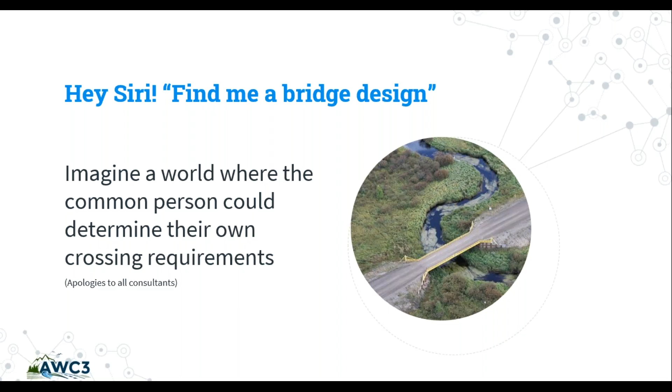So, the most common question I get when I get asked to come to a bridge site is, what do I need here? What do you need to build? Maybe a washed out culvert, it may be some failing infrastructure, it may be a complete greenfield site. A client, an asset owner, stakeholder says, well, what do I need to build? Unfortunately, in the world of construction and bridge building, there is no Google answer to what bridge do I need. If only there was. It would make my life easier, probably make it less profitable, but it would make engineers' lives easier. I guess we could say that there'd be the WebMD syndrome, where you'd have a client who thinks they know what they need, and the reality is they actually don't, but that's not a discussion we'll have today. So let's jump into this.

What this presentation is not, guys, I'm not an expert on regulatory issues, approvals, processes. I'm not going to talk to that, mainly because I don't want to be called out for it during the Q&A period, because I don't have a clue what I'm talking about. It's not a call for the change to the current code of practice. I think Steve Acorn discussed last week best management practices. These best management practices are in place for a reason. I think as contractors, consultants, clients, we are diligent in everything we do. We do try and put our best product forward. We try to manage those practices in a means that's environmentally

respectable and manageable. What I do hope to accomplish today is just rally everybody around a conversation or the necessity for a standard set of bridge specifications at the resource level, because I think by and large it's lacking in the Alberta resource sector.

This isn't a comparison or a BC trumps Alberta scenario. I see some things on both sides of the border, some that can be transferred from BC to Alberta, and of course some that can be transferred from Alberta to BC. But this particular day, I want to talk about what this standard set of specifications could look like and how it could help us as industry experts to progress water crossings in Alberta for the better, of course.

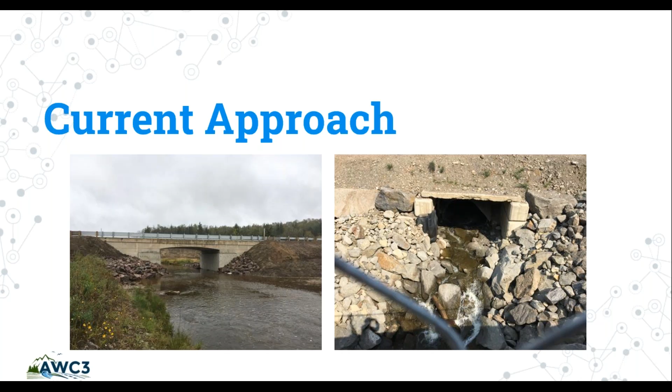So again, back to my original comment. Why is it that the Alberta Transportation Standard Specification, the same code, the same standard, the same set of design parameters is used on a $100 million highways bridge as it would be expected on a $100,000 resource bridge? And we see it all too often. You look at any general notes section of a resource bridge drawing and you'll see reference to the Alberta Transportation specifications for bridge construction. Now, let's not say there's not some good content in there, because there is.

You got to search for it though, and I hope to talk further on in this webinar about taking some of that information, taking the good bits and pieces and refining that down to something that can be used at our level in the resource sector.

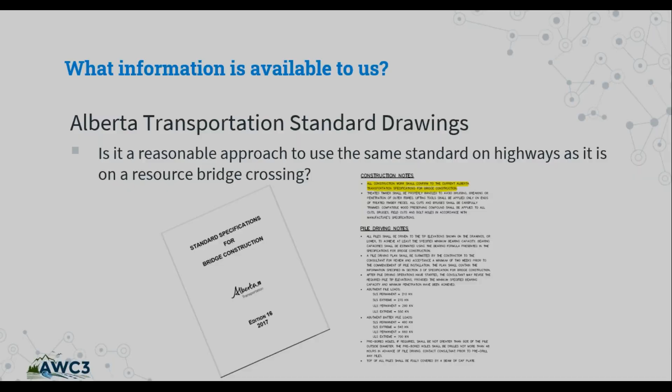What's the cost of using this Alberta Transportation Standard Specification at the resource level? If you take cost on average, and again, I'm sure some of you might disagree with these numbers, but this is just a quick historical search through tenders that I've lost in the last couple months, the average cost for a municipal highways bridge in Alberta ranges from $7,500 to $9,000 a lineal foot. Caveat.

On the resource side of things, that number comes down not significantly, $4,500 to $5,500 per lineal foot to construct a resource style bridge. Now that is supply and install, and that's not including the 40-foot bridge that you had left over from 3 years ago in the boneyard that you put a new wear deck on. This is new construction at the resource infrastructure level, supplied, installed to this Alberta Transportation Standard spec.

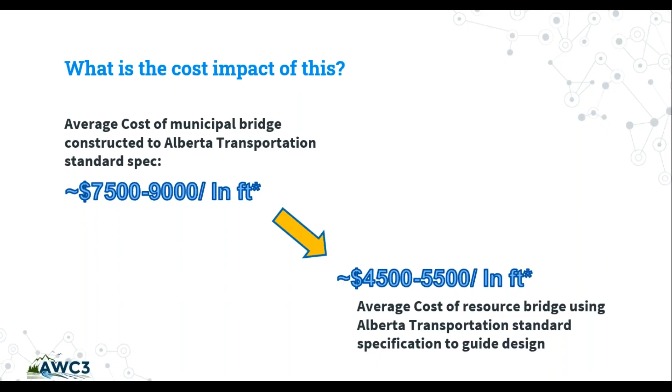And of course, what happens if you don't have that $4,500 to $5,500 a lineal foot to float? It's not a plague in our industry, but it's a blemish on our industry. When you don't have the capital, you often find yourselves doing the quick fix. And unfortunately, the quick fix all too often isn't the right fix.

I'll take this bridge for an example. Client didn't have enough funds to replace the structure. Didn't even have enough funds to test the steel for that matter, but the solution was a redeck. No timelines on when they were going to replace that bridge. They just figured a redeck would work. It would be aesthetically pleasing, and hopefully they would retire before this bridge became a future problem.

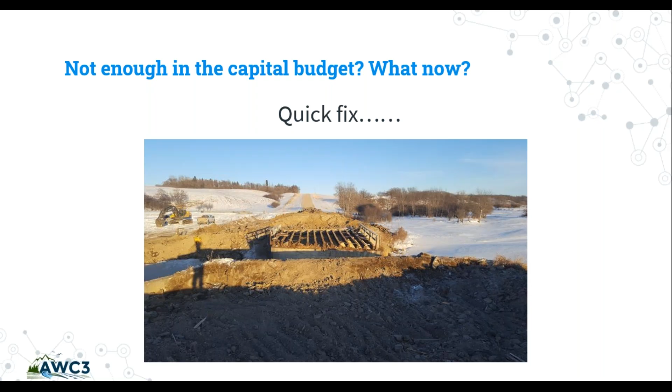So how do we improve on this as industry professionals? What do we take away from this? What do we take from that Alberta standard specification? What do we take from what we know? What do we take from each other and refine it down into a smaller package, something we can quickly reference to understand what we need in the field at any given time?

And again, I said I'm not going to stack up the flaws of BC and flaws of Alberta and compare the two. But what BC does have and what is used practically every day is a Forest Service Bridge Design and Construction Manual, or a BC Ministry of Forests standard set of specifications. This is a complete drawing set at the resource level that defines the parameters to install these industrial bridges or this industrial infrastructure. Very easy to use, very quick to reference, and an overall effective tool, to my understanding.

How is it effective? I mean, it's seen from a monetary stance alone. The average cost of a resource bridge in BC, $2,900 to $4,200 a linear foot. On the worst scale, it is still cheaper to build a resource bridge in BC than it is in Alberta. Why? I'm going to ignore the macro factors here for a second, and obviously there's some geotechnical issues and a whole bunch of other things. But at the end of the day, I would argue that by and large, the use of this standard specification helps drive everything from the engineering level to a level of comfort with the fabricator, to a level of comfort with the contractor to know what they're going to build on any given day.

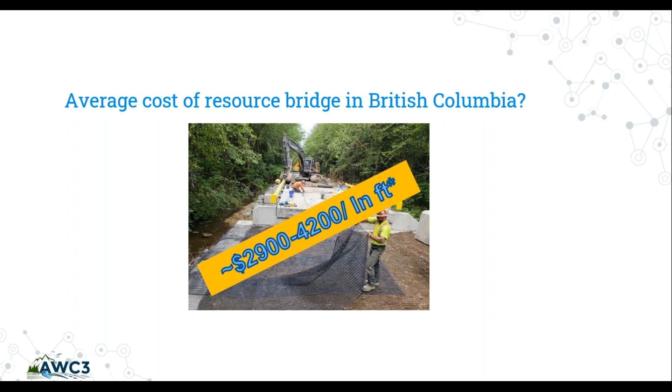At the resource side of things in Alberta, it's often, what do I have? How can I make this work? What can I take, knowing what I know in BC, and try and apply it to this? But for whatever reason that may be, the cost at the end of the day always comes out heavier on the eastern side of the Rockies. So where do we start? How do we take what we have, refine it down, still take away those key components, and come up with a standard set of drawings that applies at the Alberta level?

Arguably, it's quite simple. We take what we have. We streamline the existing standards. We choose the concepts that work for us. We choose design concepts that are practical to the client's pocketbook, practical from an engineering perspective, and we modify these with constructability in mind. What sort of equipment are we using in the Alberta resource world? Who as contractors are available out there? And essentially try and almost dumb it down so it's opening up the playing field to all contractors, all consultants. Anybody can read these standard specs and apply it to their potential crossing.

And that in itself is the basis of where I think we should start with this. Take what we have, take that Alberta standard specification, pick out the pieces that are good, pick out the pieces that apply to what we do, take out the galvanized W-beam guardrail brackets, the stuff that no one's going to look at, page 263 of the standard specs. Take that junk out. What do we need? Let's simplify it. Let's apply it.

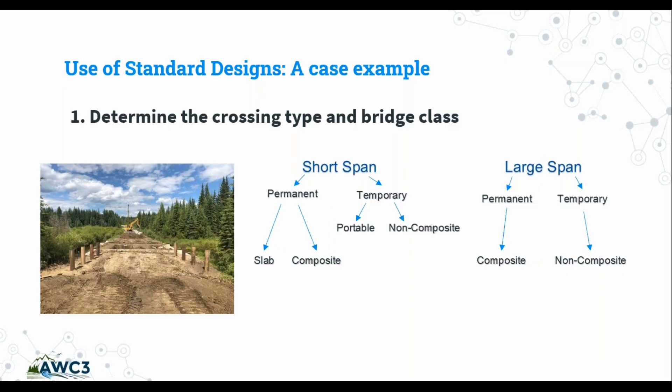Now, what sort of bridge do you need after that? My hope is that the engineers, the consultants that you hire would come in and attempt to guide your decision on whether you need a slab bridge or a composite bridge. That at the end of the day comes down to dollars, client's pocketbook, what's available to us as builders. You can take the same set of standard specifications. What do you need as a substructure? All too often in Alberta, we're going to resort to driven piles every time. There's a few licensees, woodlot owners, asset owners at the oil and gas level who recognize that some slab footings are now available to use.

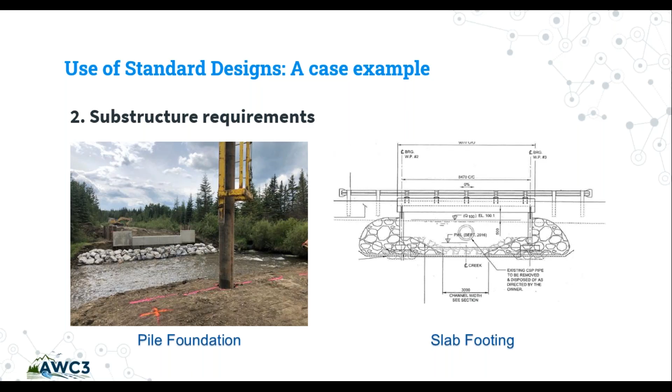So you pull up your standard set of specifications and realize, okay, what size bridge do I have? Quick reference, what size piles may I need? Or alternatively, what size slab footing do I need based off my loading requirements, my design vehicles, my bridge width, so on and so forth. And again, I'm going to jump back to the BC Ministry of Forests standard specification. Within the first 3 pages of this, you can establish those 2 things, the type of bridge you have, the type of footings you need. Now you're just saying, oh, what type of footing do I need? Is it that slab footing?

The BC Ministry of Forests standard specs is a beautiful thing because it lays this out perfectly for you. You go in there, recognize your load ratings. You have footing sizes identified right there. You have a footing type identified right there. You have your max min dimensions. Myself as a contractor, I can look at this, figure out what I need, figure out a material quantity, and without soliciting pricing from various fabricators, I can get my pricing relatively close to what the material cost is actually going to be on this bridge.

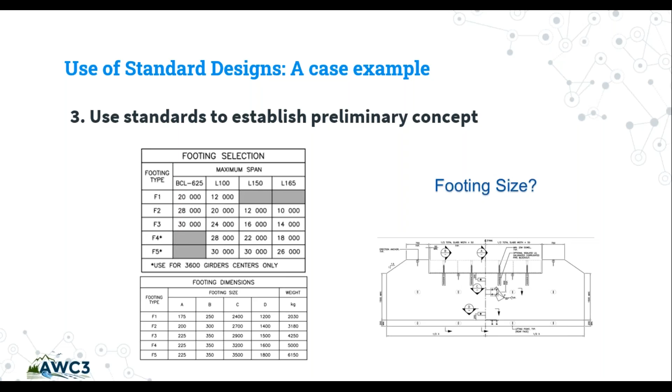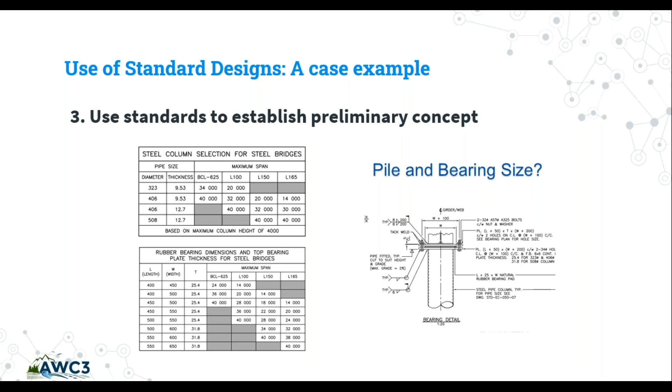The same is applied to piles. If we did decide that piles were the best method, of course, we would rely on a geotechnical expert to guide us in this decision, but we know what size piles we need. We can do quantity takeoffs based on that. And all this information is right there. It's at hand.

So why go through all this effort? Why are we as industry professionals going to collaborate and come up with an industry standard set of specifications that works for all of us? Is the benefit there? Is it worth our time, taken out of our days trying to make a dollar, to come up with what's better that someone else can use later on? That's kind of a trite response, but why the effort?

As asset owners and contractors like myself, builders, it provides us with the framework to conceptualize our own crossings. We don't have to phone the engineer on day one to get him out there to take a look at this. With this standard set of specifications, we can go out there and say, okay, with the tape, hip chain, whatever you have, I need a short span here. What type of footing? Well, phone the geotechnical engineer, kick the dirt around. Maybe you'll figure that out pretty soon. It also gives us the background to question third-party designs, potentially decreasing cost. I use this all the time in BC.

Depending on the engineering consultants, some have experience at the resource level, often others do not. And for those that do not, we see a trend to over-design beyond what is needed on the crossing. And having this framework allows you as an asset owner or a contractor to potentially question this and raise the question of potential value engineering in the structure itself.

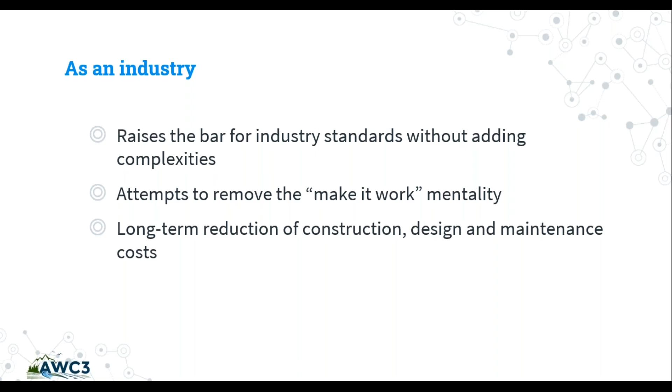So what's next? What's next for me? What's next for the consultants? What's next for the clients of infrastructure assets in Alberta? I mean, the short term, what I really see working, and I know this can be applied kind of in that northern Alberta region because I work closely with a lot of stakeholders, clients up there.

We establish a standard set of specifications at the regional level, oil and gas, the forestry, and perhaps we roll this into the road use agreements. If anyone's replacing a structure, this is the standard that we're held to. Potentially get some engineer buy-in on this and push this thing forward.

Long term, I know it does take some time to change these standard specifications. If you go back to the title page of the Ministry of Forest standard set of specifications, I think it was dated 1999. There's been some talk of some change. I'm sure there's been some amendments to that. I do know the designs are updated every so often.

To actually change this thing at the provincial level is going to take some time, but there's no reason why we, as industry professionals in this northern Alberta region, we already have the initiatives in place, of course, with this AWC3 Alberta Watercourse Crossing. A lot of the people who are active within this are in that northern region. That's where I would start the conversation. These are the people who are pushing for a change, pushing for innovation in the industry, and that's honestly where I believe it starts.